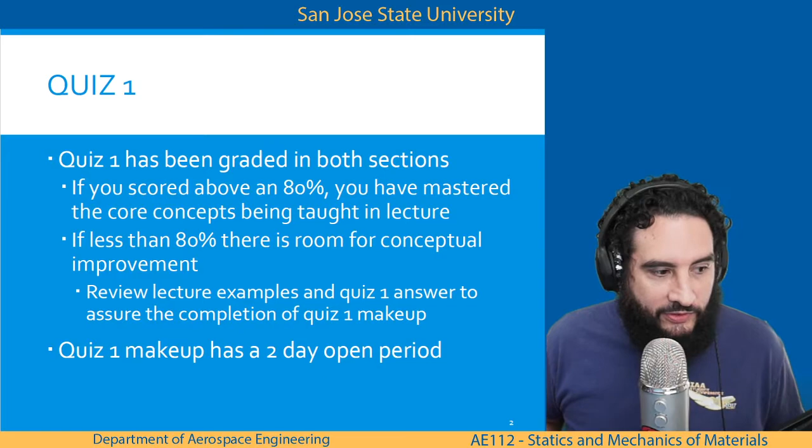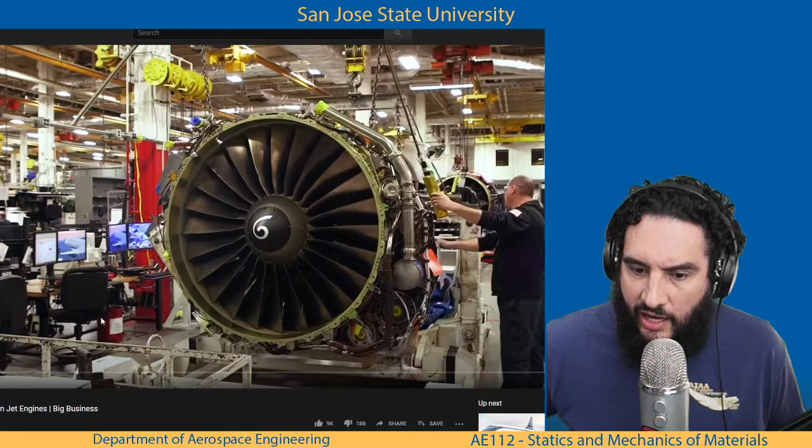Pause the music for a second. Valhalen, what part of the engine are you talking about? Because not one person designs everything.

Yeah, I thought that was pretty cool. So thank you so much, Adam.

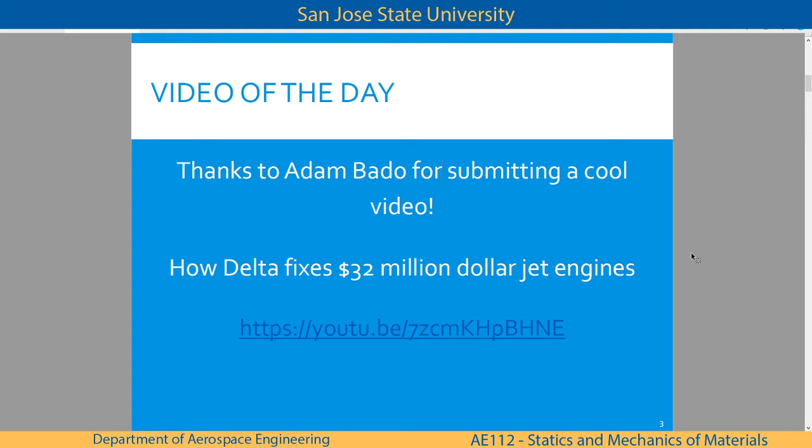Okay, let's get back into it. Propulsion. A lot of propulsion is done by chemists because at that efficiency, at that level, they want to make sure that every single particle of fuel is being mixed with the right amount of oxygen and being heated the right amount. And so that is a chemical reaction.

If you want to talk about turbines, aerodynamicists are going to deal with that. Aerodynamicists are going to do a lot of the things, but propulsion is one of those things where you're like, are you talking about how we're compressing air or how the mixture is happening? Stoichiometric - yeah, it has to be, well, supposed to be perfect.

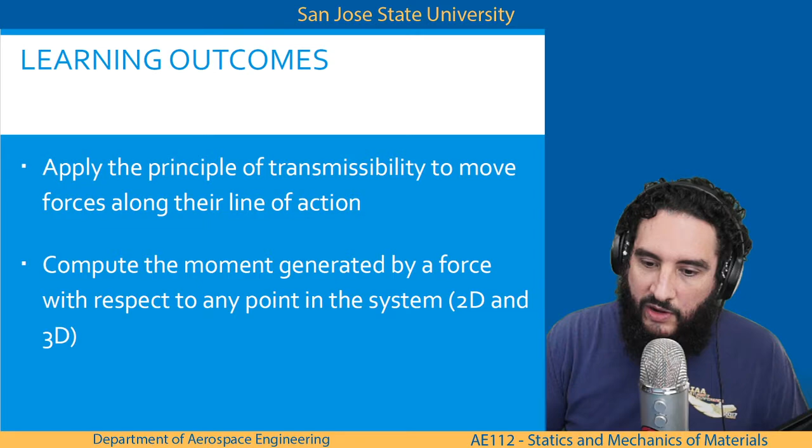Okay, so today's learning outcomes are going to be to apply the principle of transmissibility to move forces along their line of action, and to compute the moment generated by a force with respect to any point in the system, in 2D. I didn't get to 3D yesterday, but I'm going to try to stick around after this lecture and create a video, so that we have a moment generated by a force in 3D. We have that example.

Okay, so let's talk about equivalent forces. The first one we're going to use is something that makes it easy for us to make calculations later on, and it's called the principle of transmissibility. It states the conditions of equilibrium or motion of a rigid body will remain unchanged if a force F, acting at a given point on the rigid body, it is replaced by another force F prime of the same magnitude and direction but acting at a different point, provided that the two forces have the same line of action. I'll let you guys read this and absorb it, as this is something we're going to use and abuse to make our math easier.

So the truck here has a weight, 2 reactionary forces on the wheels, and it's got 4 people pulling on a rope in front of it, force F. If you take those 4 people, exchange the rope for just their hands and push on the back of the vehicle, it's the same thing, it's fine. Okay, moving on.

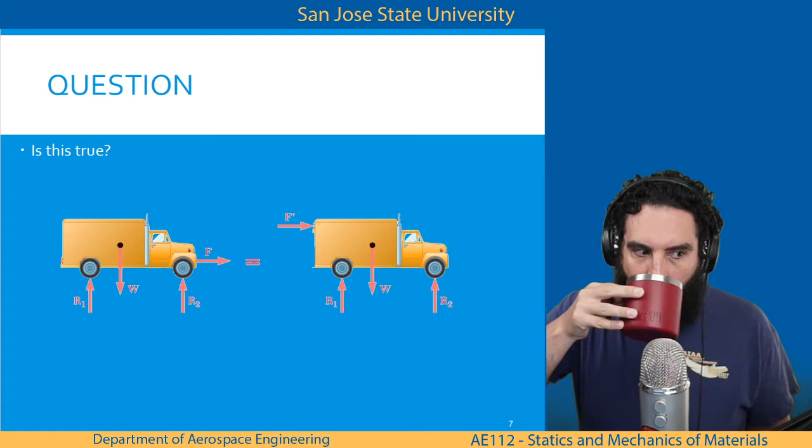Anybody for yes? I didn't get anybody with this today. This is like one of the very few times where I'll give you a gotcha question. Wilbur, I'll go yes - yeah, Wilbur, if you can unmute and describe why you think it's yes, we'll hear what kind of possible answers we can have.

Shit. Explain to us why it's no then, Wilbur. Sorry, no mic right now.

All right, Ryan Murphy - was that? Ryan, explain to us why it's no. Because in the first, on the left side of the equation, it's a pulling force, so it's just horizontal. But when you have that on the right side, it's at the top, the force is high up, so it's pushing it around the center of gravity of the truck, creating a rotational force instead of just a straight one. Well, it's both rotational forces, but they're in different directions, if that makes sense.

Yes - not quite what I was looking for, but yes, this is not true. Anybody else want to take a stab at this? Rashad?

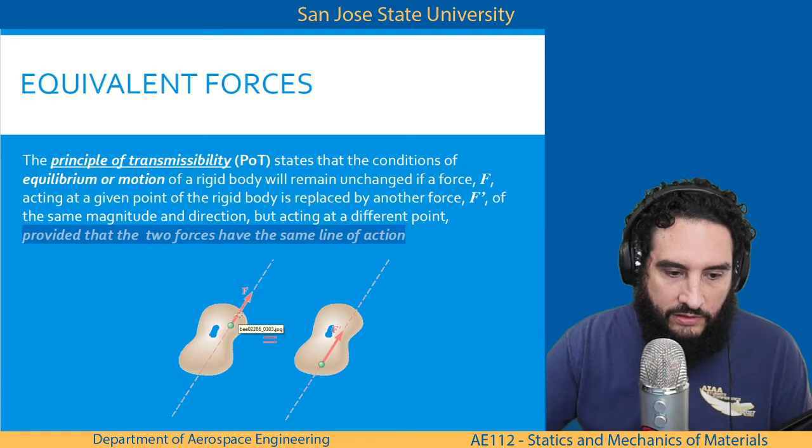I was just gonna say it's not on the same line of action. It's raised. Correct, and that's really the big deal that we're dealing with here. So if I go back a couple slides, this says same magnitude and direction, which is something that we satisfied with that. F and F prime looked the same magnitude and direction, but they are not acting on the same line of action. So it was Ryan that, what happened here?

So we talked about rotational, what the truck would actually feel, and he's spot on with that, because on the left hand side, if you put a pin at W and we're able to pull F, it would rotate counterclockwise. Is this counterclockwise to you guys? It's counterclockwise to me. It'll rotate counterclockwise. But if you put a pin at W on the picture on the right hand side and push with F, the truck would rotate clockwise.

Ryan, it's okay. As long as you're brave enough to speak up, I don't care. But we like to hear these dissenting arguments, because you're going to be in a boardroom one day and people are going to say, no, that's not right, and have some physics or math to back it up. And you just have to be able to keep your wits about you and say, no, we go back to first principles. These are why we cannot do that, or this is why we can do that. So we're all good here.

So correct answer was no. Even though it's acting in the same magnitude, same direction, it's not on the same line of action, and therefore this is not true. Cannot do this.

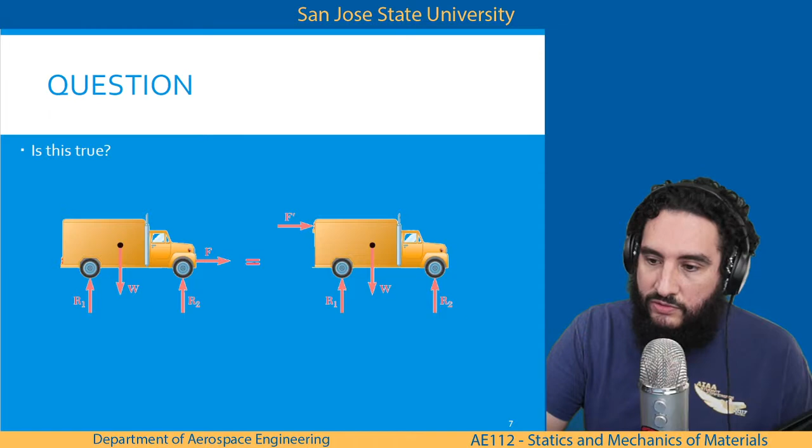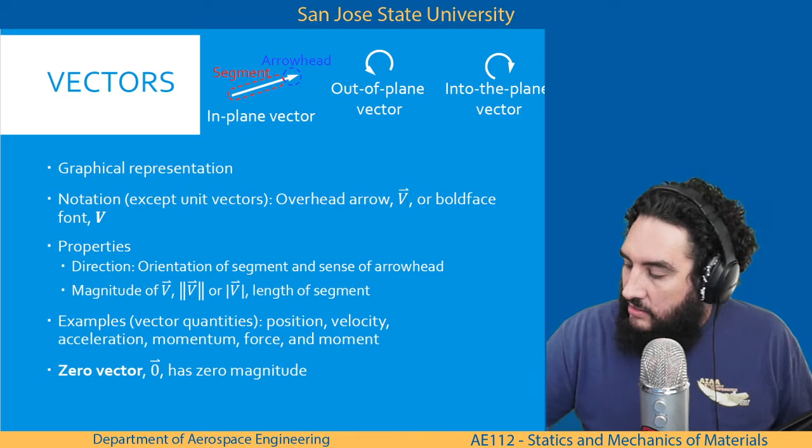Okay, the vector product direction is going to be perpendicular to the plane containing P and Q. So the plane here, P and Q, the resultant vector of this cross product is going to be out of that plane. It's going to be perpendicular to it. And its positive direction is based on the right-hand rule.

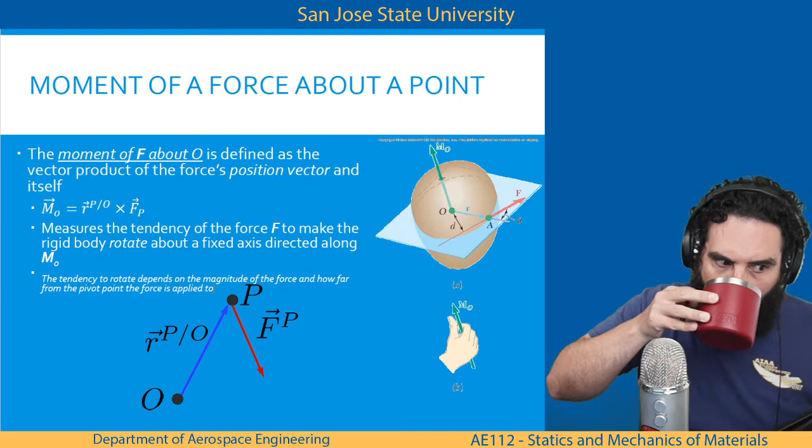Long enough stick and you can move the world? Technically, the world would move the stick and you just drift apart. All right, any questions? Moving on.

Let's do an example. A 20-pound force is applied to the control rod AB as shown. I'm going to be calling this member AB because this is actually a rigid body member. So when you see something that looks like AB, calling it a member is a little easier for someone else's mind to pick up and know exactly what you're talking about.

An Archimedes quote. Dope. Did not know that.

So, knowing that the length of the rod is 9 inches and that alpha is equal to 25, determine the moment of the force about point B. Do this two ways. We're going to resolve the force into horizontal and vertical components exactly as it sits, the typical y is up and x is out to the right. And then we're going to do it again by resolving the force into components along AB and in a direction perpendicular to AB. That's fancy for saying we're going to rotate the coordinate axis, and we're going to use the principle of transmissibility to simplify our math equations.

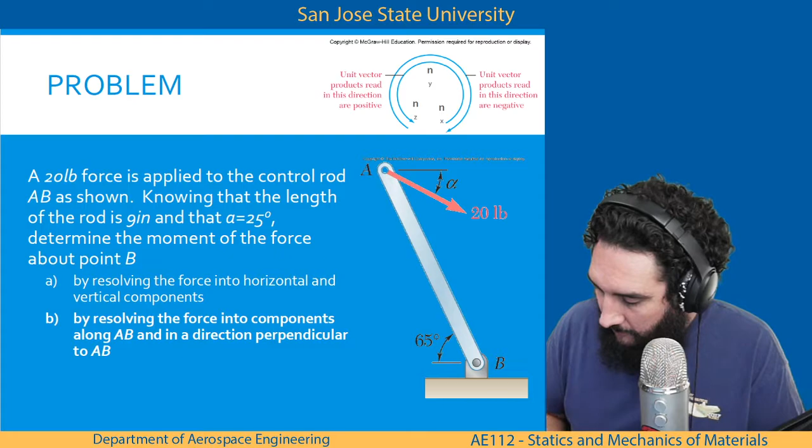I'm excited. I'm going to show you guys something new pretty soon. All right. New reveal. We got a different camera angle. Hopefully it's gonna be better. Fills up more of the screen, but the only challenge I have with this is whenever I move anything on the desk, the camera shakes. But I'm trying.

Okay. Does your free body diagram look like mine? Okay. So I have my drawing redrawn here. People always ask me, why do you redraw these? And yeah, it's for you. Even when I was going through school and taking this class, I would redraw the picture simply because if you're staring at a blank piece of paper and you don't know where to start, redrawing the picture allows you time to do something else with your eyes and your hand because you're just copying, right? You're not really thinking about what you're doing. And it allows your brain to process what's actually going on here.

Where's this angle measured from? Where's this force being applied? What are these vectors asking for? You have time to think about it and process. Like when someone asks you an interview question, like, well, tell me about yourself. And you're like, that's a really good question. That's one of those stalling tactics your brain can use so that you can load into RAM your thoughts, and it comes out nice and smooth. No stutter.

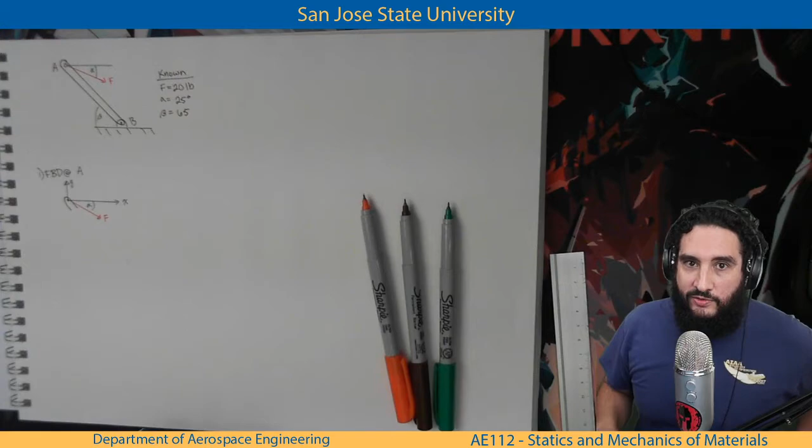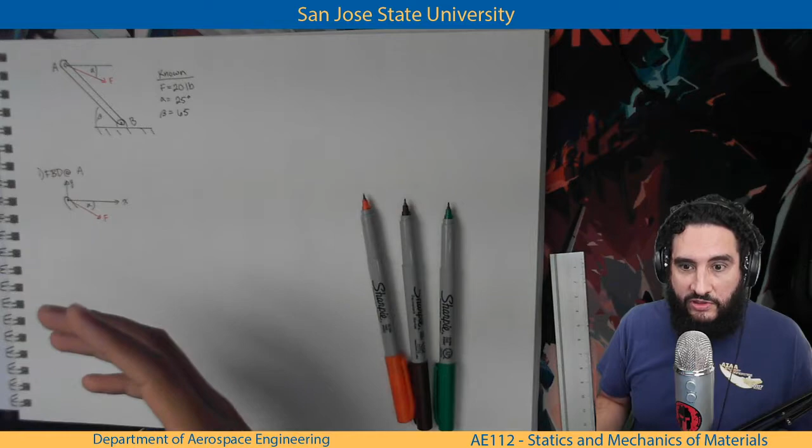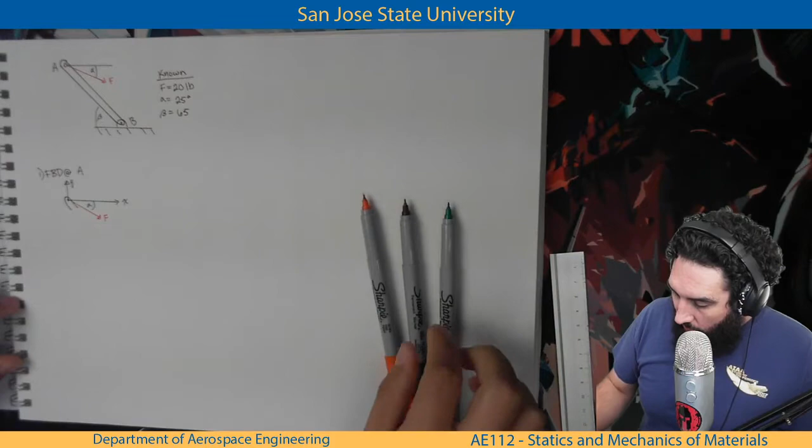Facts. Okay. So that's a reason why I like to go through these. Kind of gets me primed up, familiar with the problem. And then I don't need to keep looking back at my reference source. I can look at my drawing. Okay, so I have my free body diagram at A. And let's turn this on. Oh, I made this bigger too. Although my head blocks a little bit of it, you still see most of it.

Okay, so I have my free body diagram, and I want to resolve the force into horizontal and vertical components. So I have a standard Cartesian coordinate system, with X off to the right, and Y going vertical as I see it.

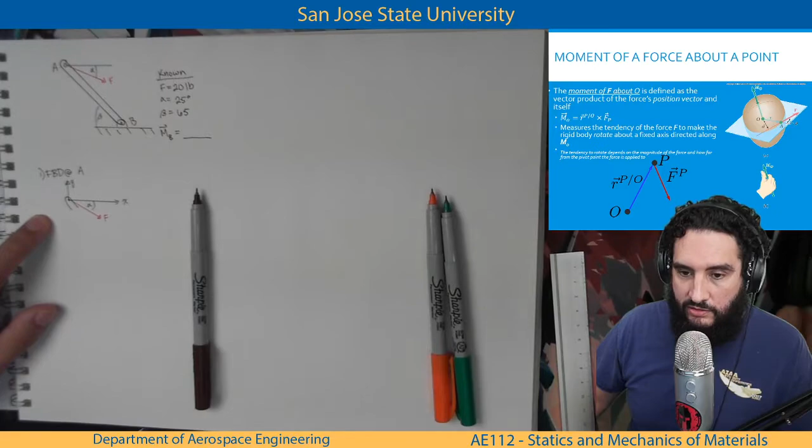So we want to answer the question: determine the moment of the force about point B. So I'm looking for vector M about point B, equal to... if we go back to what M is equal to, it's R cross F. So let's find the R vector, then let's resolve the F vector, and compute our moment.

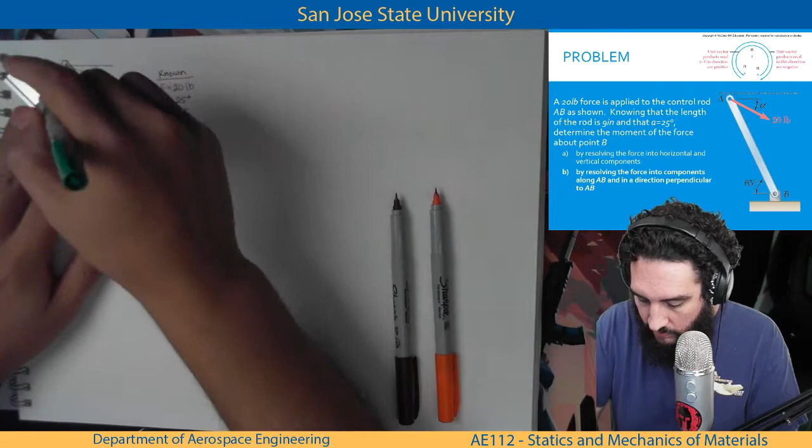Oh Dalton, you're absolutely right, my drawing is missing the length. Keyboard's in the way now. Good catch, Dalton. And we are at 9 inches. Okay, good, now I think we are set up and ready to go.

The R vector. So, step 2: define R, A to B, and force in x, y hat.

Okay, so let's start with our position vector, B relative to A. And this is also going to equal vector BA.

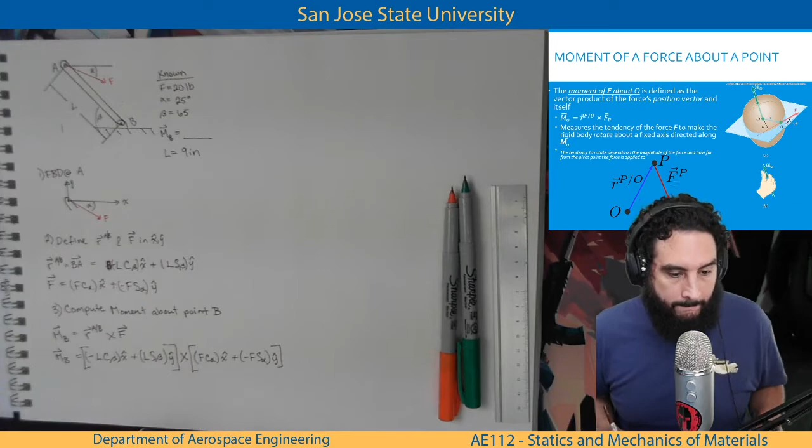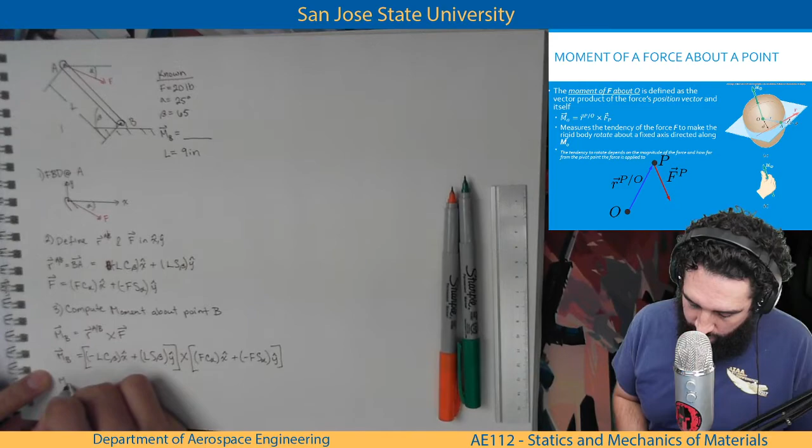We happy? We tracking? Okay, so now...

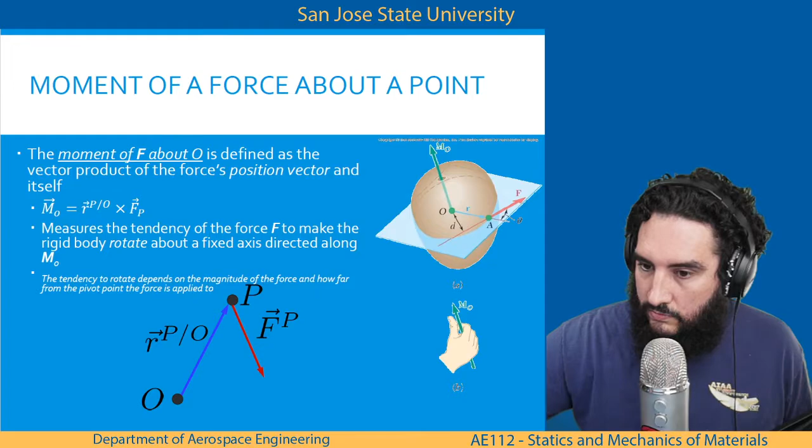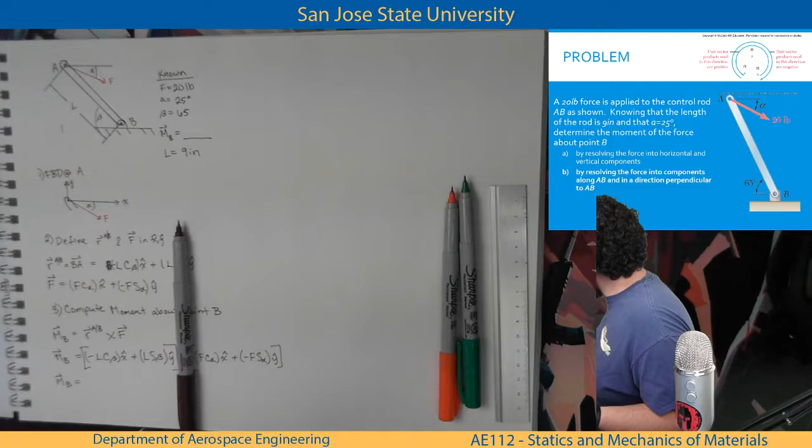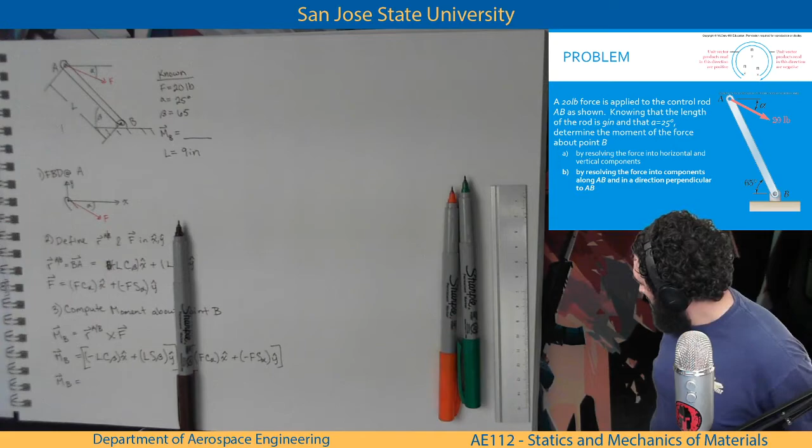He literally tucked himself into the bed and he's barking from underneath the bed right now. Navas? Nope, wasn't the dog. It was grandma telling me she's leaving. He's in the bed right now, tucked himself in, unmade my bed.

Where were we? So we're about to FOIL this R cross F. X cross X is going to be equal to 0. Y cross Y is going to be equal to 0. So let's FOIL this out.

Negative L cosine of beta times F cosine of alpha in the x hat direction is going to equal 0. We'll move on to, let's write that out: negative L cosine of beta times F cosine of alpha. And I'm going to cross this out and call it 0, because x cross x is equal to 0.

Move on to L sine of beta times F cosine of alpha. Okay, so now I have a y cross x. The resultant vector is probably going to be z because I don't have a z, but what direction?

So this is when I write out x, y, and z. Okay, I don't care what direction you put these or where you put them, x's on the top, y's on the bottom. That doesn't matter. What you need to think about in your head is that with the right hand rule, x cross y equals z. That's the right hand rule.

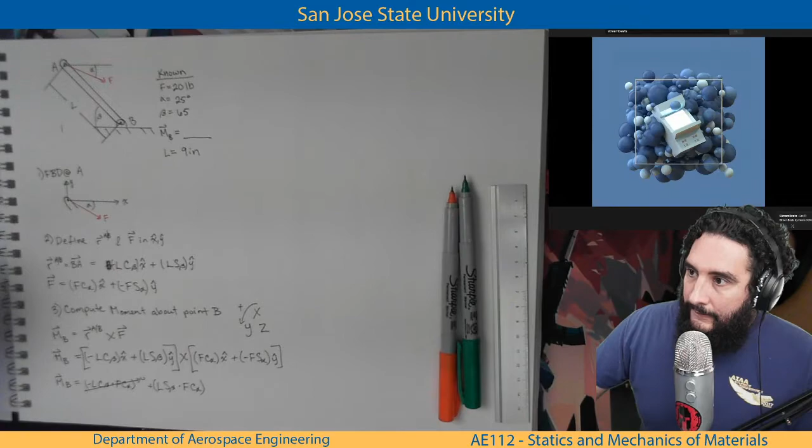Something happened to music. F's or pogs in the chat. I need something here.

Thanks, Jose, F on the drawing. We'll do it many times. But X, Y, and Z, from X to Y, arrow, make that positive. Alpha? I don't know what that means.

I'll go through this because I'm getting a lot of F's, it's okay. So Y cross X is going against the positive direction, so I'm going to add a negative in here. And I didn't leave enough space, so there's an extra negative hanging out in the middle of space, and that is going to be in the Z hat direction. So I did X cross X and Y cross X. Then I'm going to do X cross Y.

Negative L cosine of beta multiplied by negative F sine of alpha, and it's X cross Y. X cross Y is going in the positive direction, so that will remain positive. And the last one is L sine beta Y hat times negative F sine alpha Y hat. These are also going to equal 0, because Y cross Y is equal to 0.

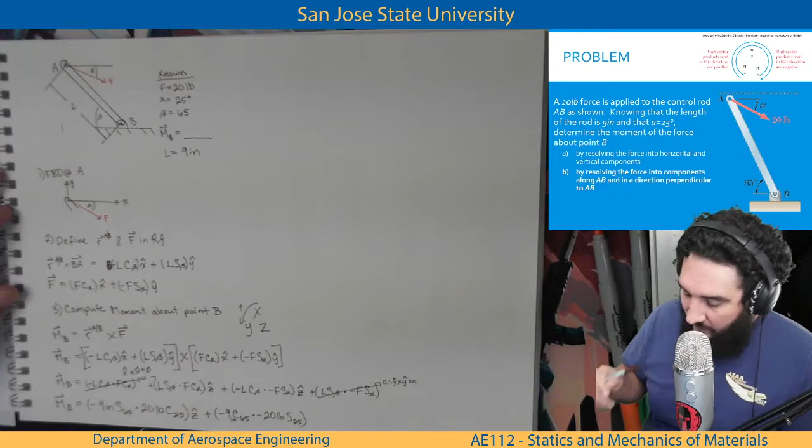Oop, that's not a 4. Moment B. I don't know where I put my calculator. Found it.

Can we see this? That's pretty good. Okay, negative, parentheses, negative 9, sine 65, close parentheses, times 20 cosine 25, close parentheses, enter.

Negative 147. Check the notes. We good. And the units on this are going to be inch pounds.

Open parentheses, negative 9 cosine 65, close parentheses, times negative 20 sine 65, close parentheses, enter.

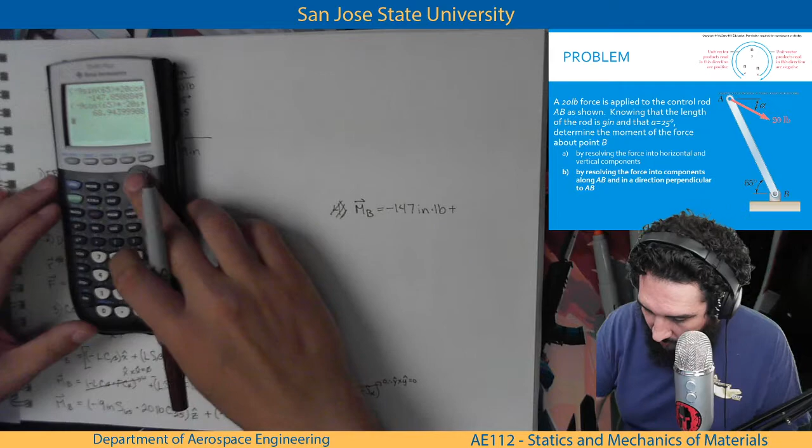68, did we get that right? We did not do that right. What happened here? 25.

So I made a calculation mistake here, where on my paper I wrote sine of 25, and in my calculation I wrote out sine of 65. These errors are super minimal, and as long as you show your work and what goes into it, if I would have put the 68 here, I'd have gotten most of the points. Maybe 2 or 5 points off, depending on the value of it, but it's going to be super minuscule. Don't worry about calculating things incorrectly.

My favorite part about vectors is little hats. Hey, I like those. Okay, so those added together will be MB equal to negative 115 inch pounds.

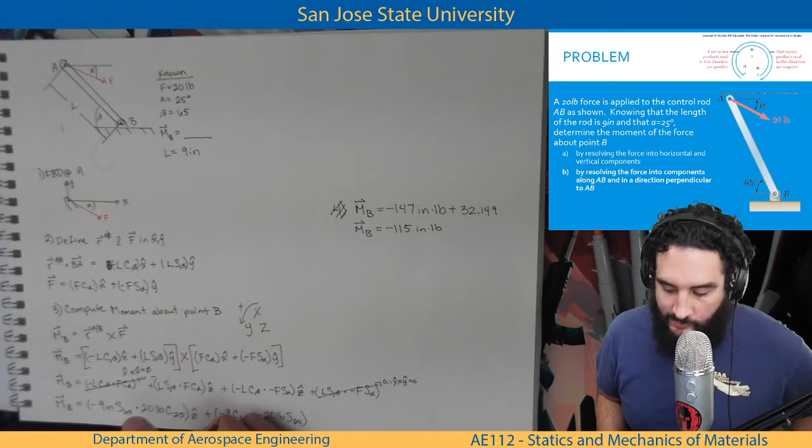The negative is important for us right now. Anybody want to be brave enough to talk about what the negative actually means in this example? Oh, somebody was unmuted. They're like, I want to be brave enough. Is it that it's going into the page? Yes, going into the page.

So let's unpack this a little bit. The negative 115 means that based on our coordinate system, if x is this direction, y is this direction, the positive moment will be notated like this little picture that I drew before. Positive, positive, and that's my moment, positive direction.

That's the right-hand rule. Because it's negative, it is not acting in this direction, so I can report my answer as 115 inch pounds, and I can draw the vector the correct direction. Or I can put clockwise, CW. So this would be generally the most accepted answer. Negative 115 would be fine too. You could circle that, not a big deal.

But in your head, you should say, okay, if it's acting counterclockwise or clockwise, does my picture agree with that? And so if I'm looking at point B and I have a force vector that's pushing this direction, pulling this direction, the tendency for it to rotate is around B in the clockwise direction.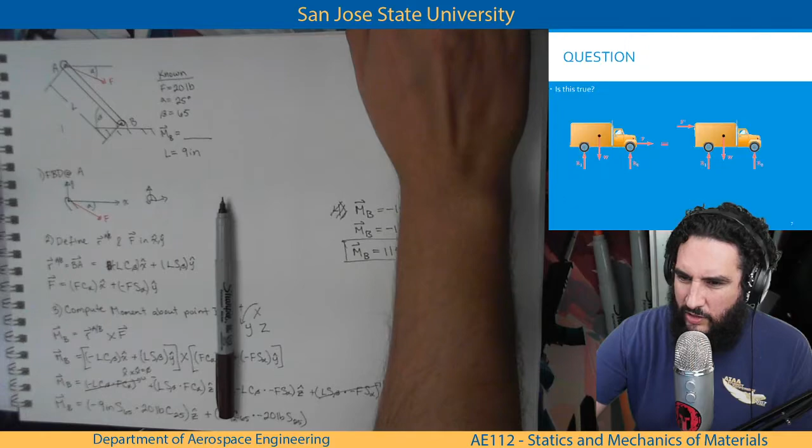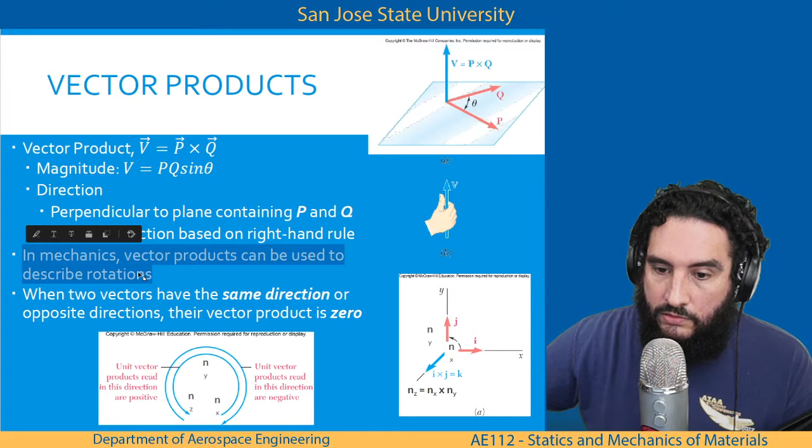So this is what we are using this for. In mechanics, vector products can be used to describe rotations. We are describing rotations with these moments. So when we want to describe the rotation, simply putting clockwise or negative 115 inch pounds. I guess the negative 115 inch pounds, you could put z-hat here, showing that we rotate about this point.

But that's still, no, that's not true. You can't do that, because a moment is not in that axis.

Okay, we would expect that since the force would make the arm rotate clockwise, right? Yeah, we would expect that. By visual inspection, if you set this up and you pull the string, it would rotate clockwise about point B. Okay, we happy with this?

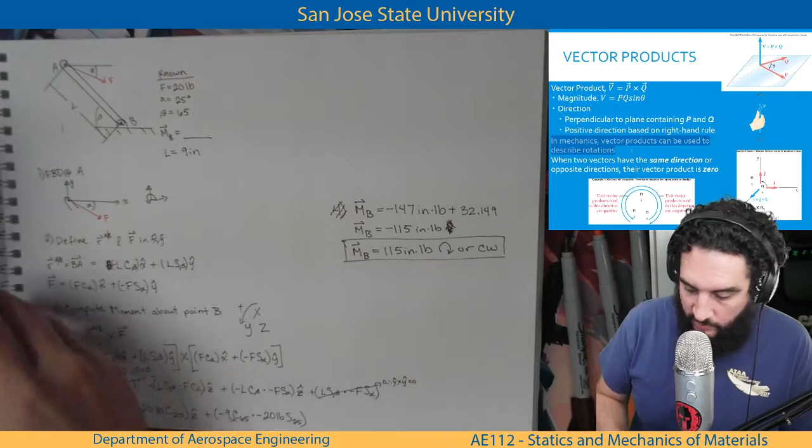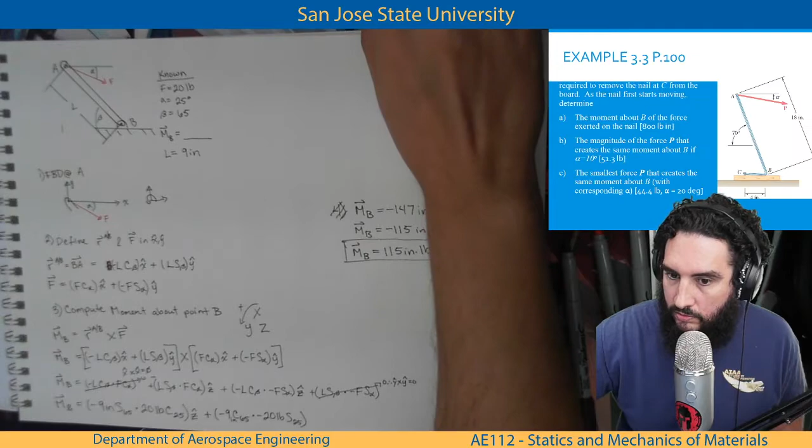Let's move on to part B. And remember, point B, part B, is going to be resolve the force into components that are along AB and in a direction perpendicular to AB.

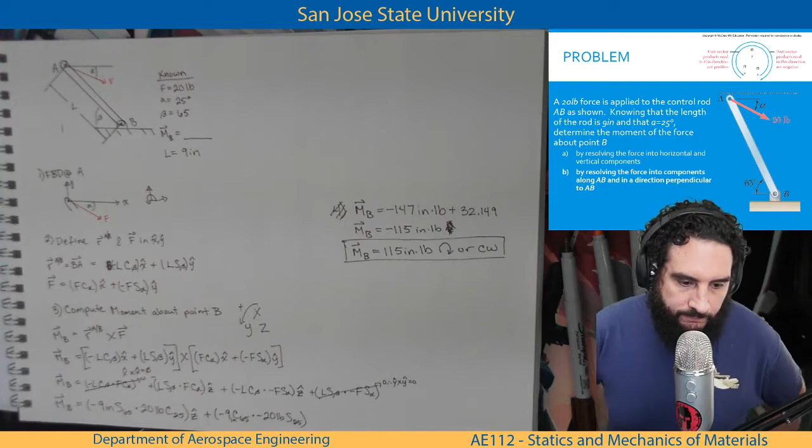No, Ryan, it cannot. Because once we do the X and Y calculations, actually, that's a more complicated question, and I don't know what you're looking for, but we'll talk about the different ways it can be reported. Because if we're in 3D, we can have a rotation about axis Z, we can have a rotation about axis X, and we can have a rotation about axis Y.

It can't because it's a cross product, but if you have multiple things working on a particular body, you can have rotations about all three axes. So we can report a force in the X, a force in the Y, a force in the Z, and we can report moments about X, moments about Y, and moments about axis Z. Force about points, moments about axes, because they're rotations. Okay.

Let's move on. And we're in lecture 4. Example 1. Part B.

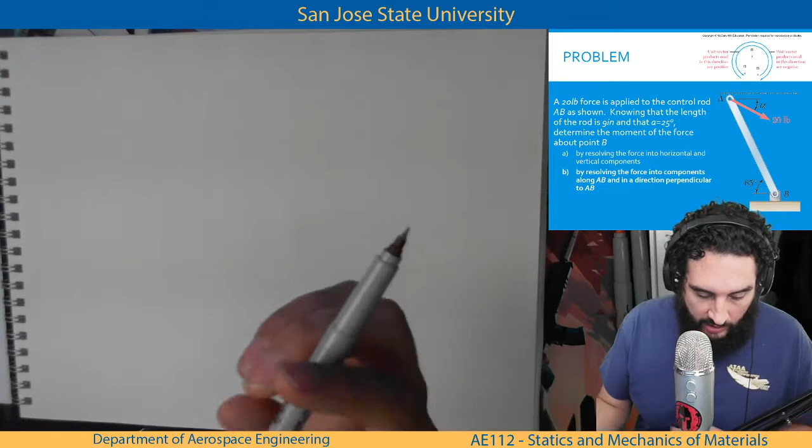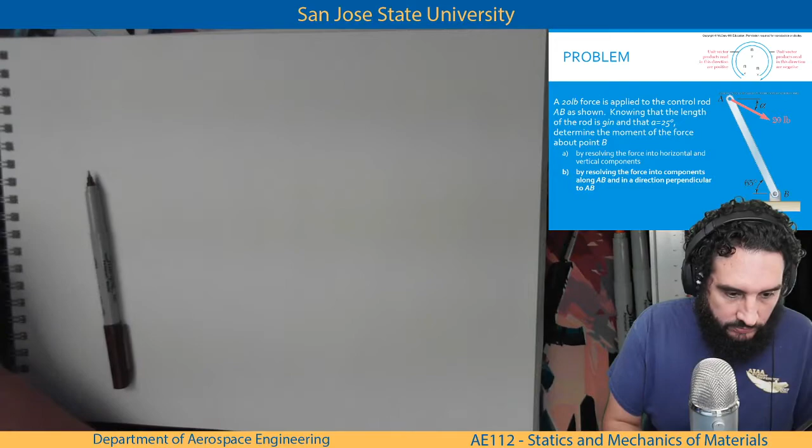Okay, I'm going to draw the same thing a little less neat this time, and we're going to see what it's like if we have a rotated coordinate system, what it does to our calculations.

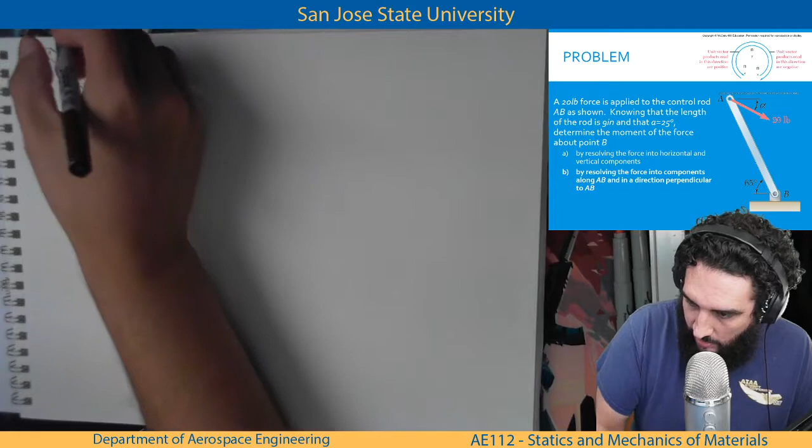Member AB, B, A. Okay, again our knowns: length is equal to 9 inches still, F is still equal to 20 pounds, alpha is still equal to 25 degrees, beta is still equal to 65 degrees. I think that's all I need.

Okay, again, so we start with our free body diagram at A. Now in the free body diagram, we would like to resolve the force into components along AB and in a direction perpendicular to AB. I'm going to show a rotated coordinate system axis, which this will now be Y, and this will now be X. We tracking with this?

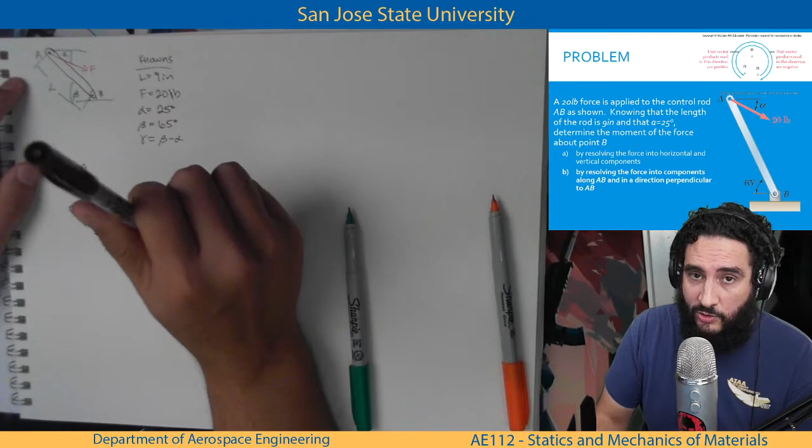Is this the way it was done in the example in the book? I'm not sure, Rashad. I'm not sure. It probably is. I know there's a question on the homework very similar to this, so pro tip, if you're doing the homework, this is on there.

Are we happy with gamma equals beta minus alpha, using alternating interior angles and beta? And that's going to equal 40 degrees. Perfect, that's why I asked.

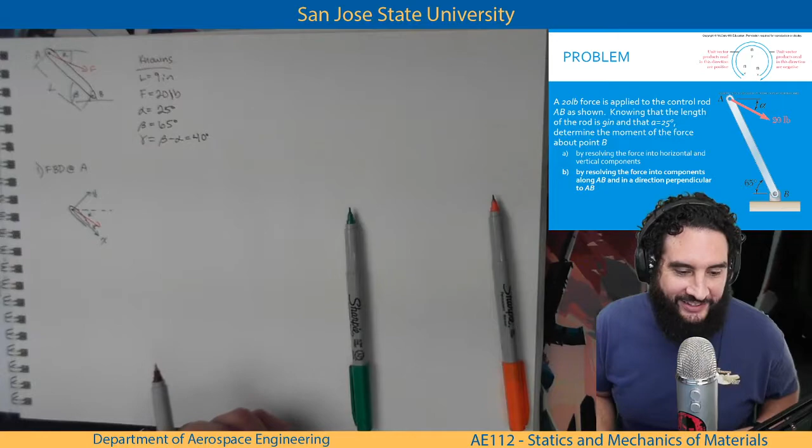Okay, so we're all set up now. We have alpha defined, we have gamma defined. Let's move on to resolving. I can't move the paper. Ooh, I want to draw over here. So moment is equal to r cross F. Let's draw r first.

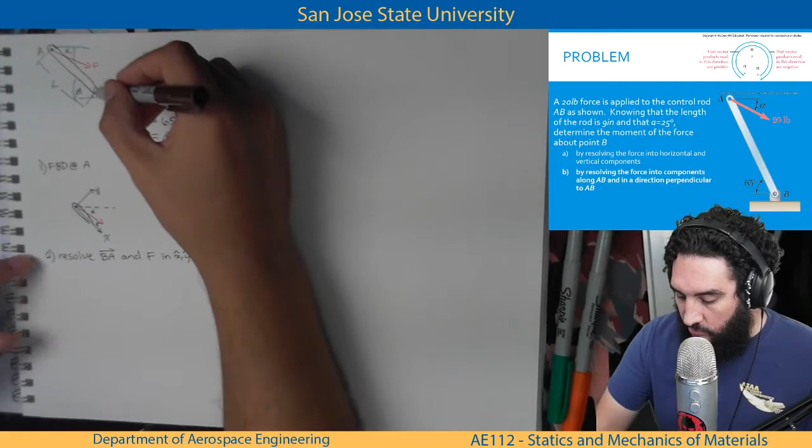Resolve BA and F in X and Y. Member BA in the rotated coordinate system axis, distance from B to A is still 9 inches, and it's going to be in the X direction, so BA is equal to 9 inches, L, X hat. Since it's going from B to A, and I have X set up going downward and to the right towards B, this is going to be a negative length.

Gamma is smashed in between this little spot here. What happens when I don't use a ruler and stuff. So gamma is the distance between - gamma's right here. I put gamma here, but it's a pretty bad drawing. Okay, we all happy with how we have negative the length in the X direction based on our rotating coordinate system?

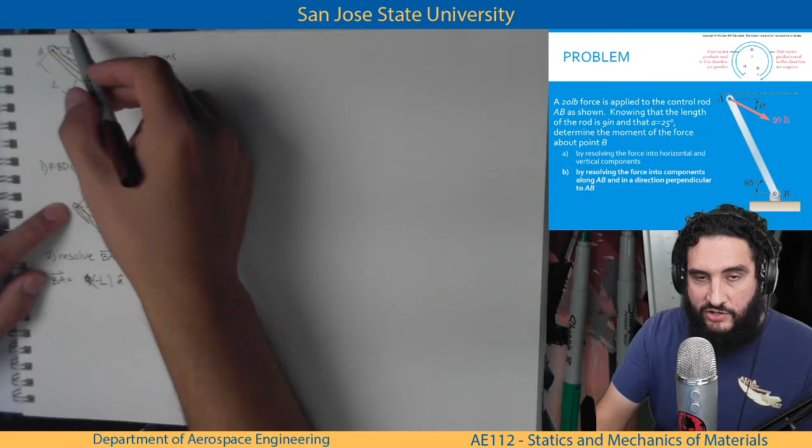Okay, why is X negative, and why do we have Y? So I have now taken my coordinate system from the standard X and Y, and I have rotated it to be along the member AB. So if this is member AB, this green pen is member AB, this is Y and this is X. From B to A, from point B to point A, that distance is 9 inches. It's L.

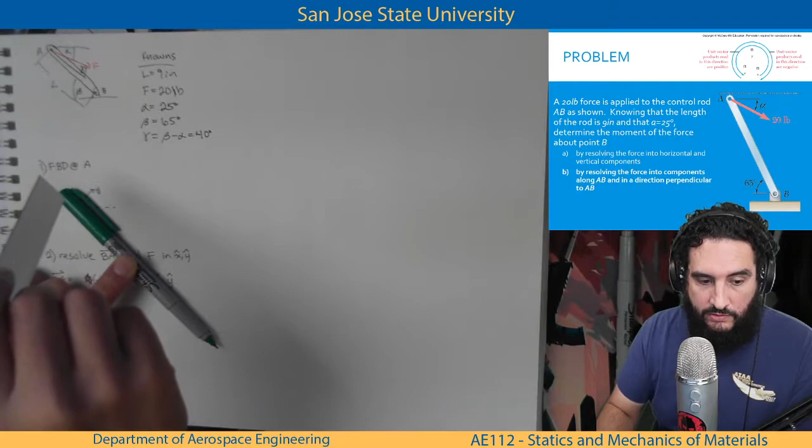We have defined from the cap to the tip to be positive, that direction, downward and to the right. From B to A, that is going the opposite direction, so from B to A, it looks like it's going negative L inches. Tracking, Wilbur? So that's why it is negative L in the x-hat direction.

This is another thing that tripped people up on the quiz - relative to one point relative to another point, and what makes things negative. So I'm okay with answering these questions. And then 0 y hat, because we have nothing in the y. It is essentially on the x-axis, so we don't have a y component. So if we rotate our coordinate system, we only have one component taking part in this moment calculation.

Okay, so let's go on to F. F in the x direction is going to be equal to F cosine of gamma, x hat direction. We've defined it down to the right, F is going down to the right, so it's going to remain positive. Y hat direction is going to be magnitude F times the sine of gamma, and y is up, F is also going up, so that value will also remain positive. Are we happy with how we got here?

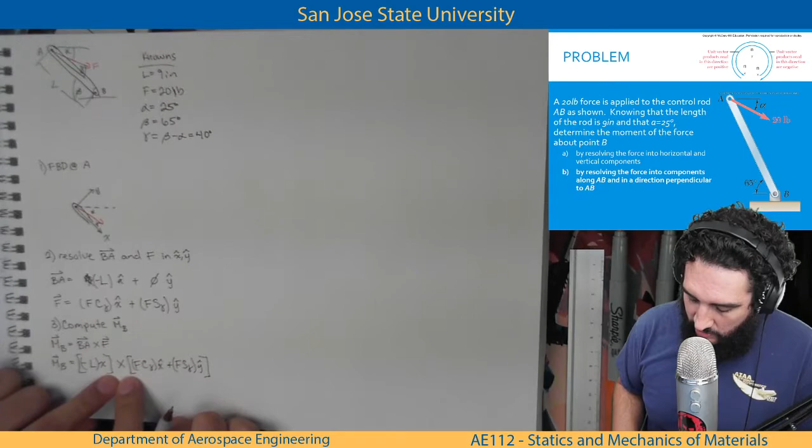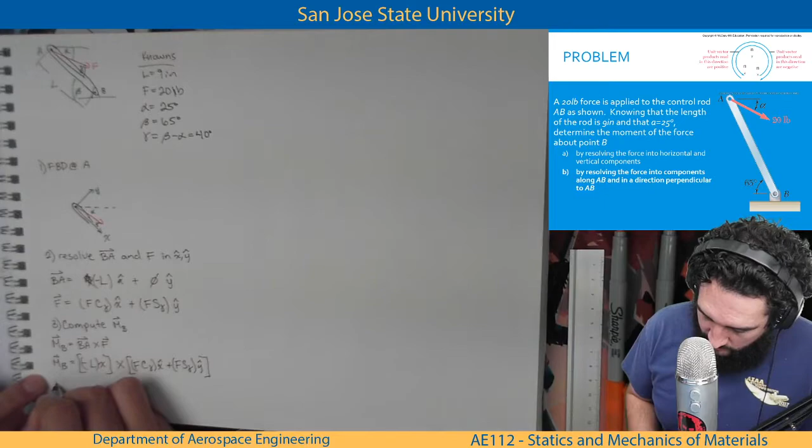For the moment calculations, I really enjoy using brackets to separate the two values so I know when I'm adding and when I'm multiplying. Let's plug in the values. Actually, let's do the calculation first and then I'll plug in the value.

So negative L x hat times x hat. We don't need to do that calculation, we know it's going to be 0. I'm not going to copy it down again. Fine.

So I'm going to do x cross y. So negative L times F sine of gamma, and I'm doing x cross y.

I know that via the right-hand rule and this motion I do in class all the time, x cross y is going to be positive. I know that x cross y is positive. I know that. And x cross y is positive.

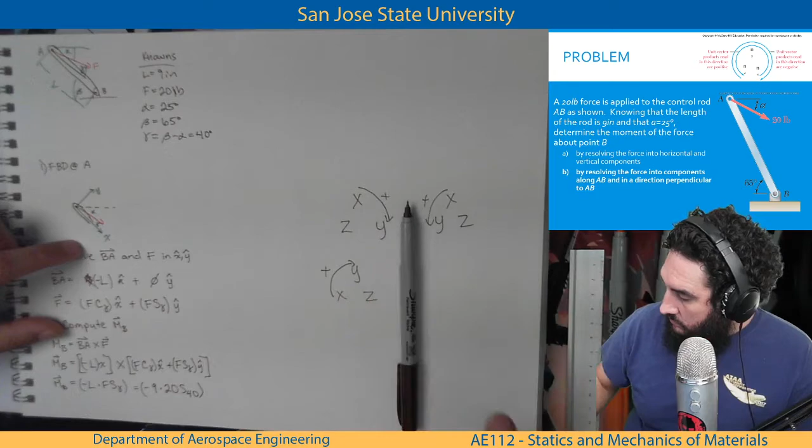So this will equal negative 9 times 20 sine of 40. Negative 9 times 20 sine of 40. Negative 115.7 — what do you know. I might round this up to negative 116.

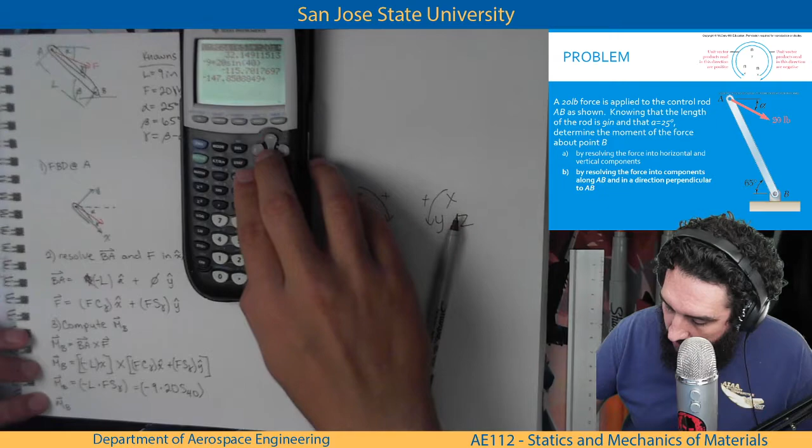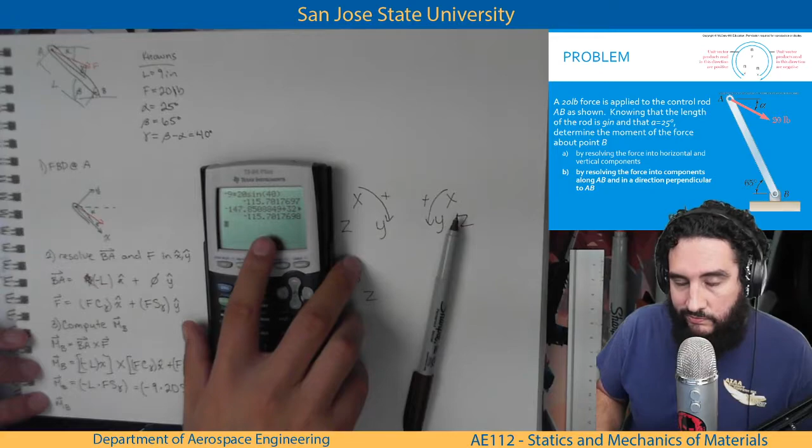So MB — actually, what did my last one come out to be? Oh, I didn't do it. Okay, so they literally came out to the exact same thing, 115.7. I probably should have rounded that up to negative 116. It's still within the margin of error, it's fine.

Somebody want to enter? Oh, I totally did. Totally did. Somebody want to answer Deshant in the chat, in the Zoom chat?

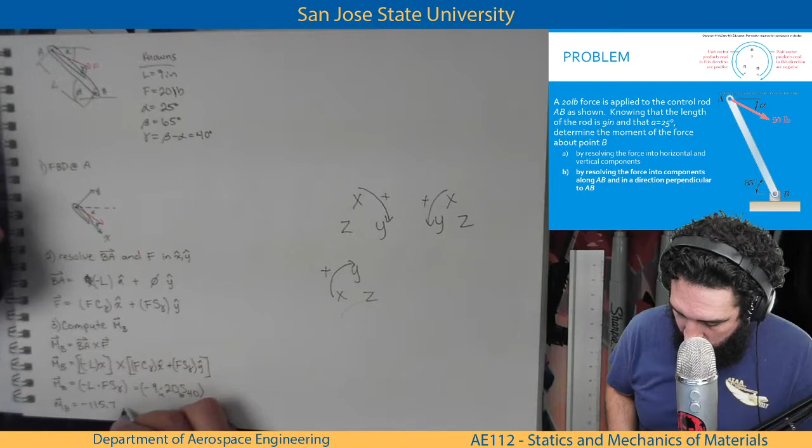So negative 9 times 20 pounds sine of 40, negative 115.7. Again, this answer is negative because it is not going the direction that we set forth here — it is going in the clockwise direction. 115.7 inch-pounds in this direction, or clockwise.

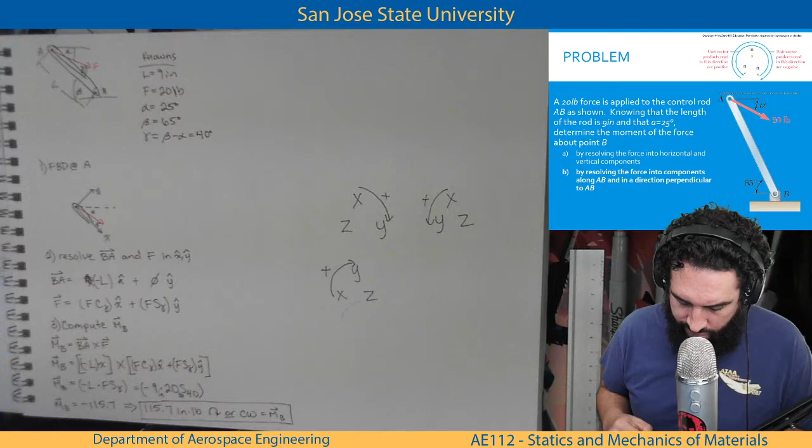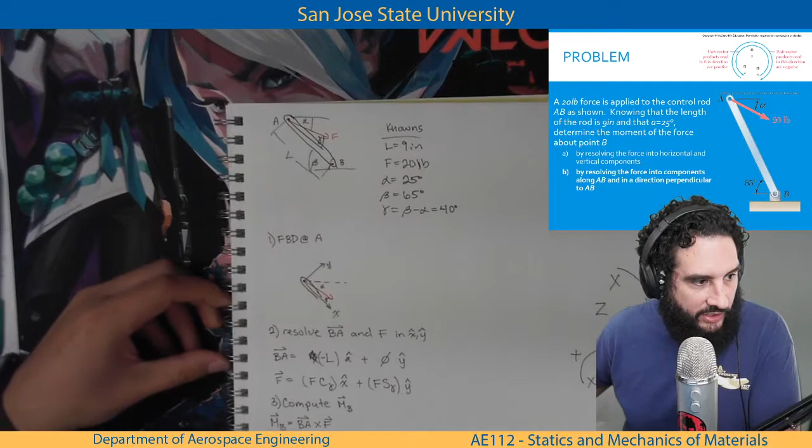Is it blurry on Twitch too? Thought I fixed this camera today. I'm doing the best I got, man, doing the best I can. Yeah, it looks a little fuzzy up here, and it looks really clear right here, so that's probably a function of where I have the focus set. Yeah, look how clear that is there. Woo!

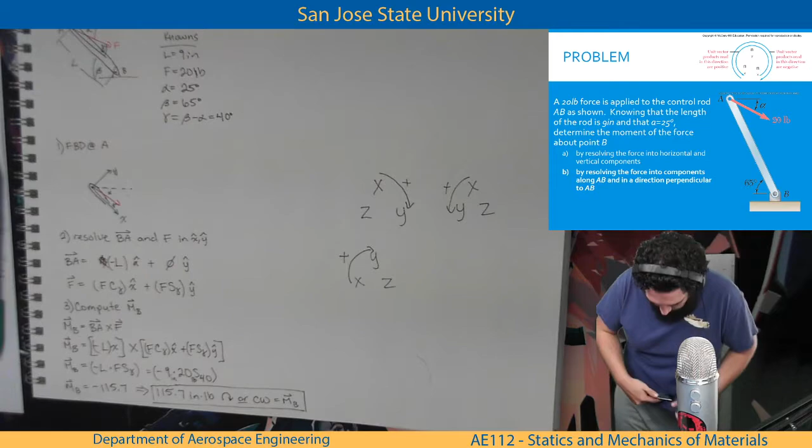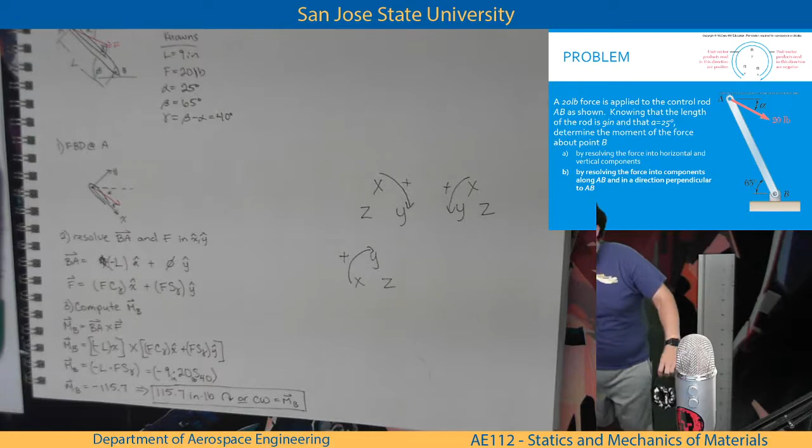Okay, we'll talk about this one day, because this camera is a DSLR on a tripod. This thing is super precariously placed, and I actually have a backpack holding it down on the other side. So, what it do? Yeah, I wish I could show you guys. Actually, I will do that — I'm gonna take a picture of this because it's ridiculous. I'll post those in the Discord. Yeah, this is ridiculous. Can I do this? Is this a thing? No. Anyways, I'll post them to the Discord, you guys check it out. But, are we happy with this?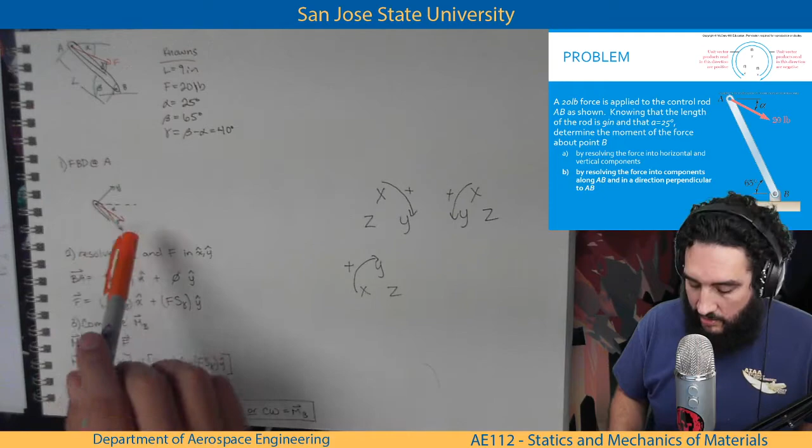Did you see how I used the principle of transmissibility to kind of backwards simplify my equations by getting rid of one component in the y direction and rotating the coordinate system? And I don't have a cosine and sine here, I only have a number. So that makes my calculation -9 times 20 cosine of sine of 40 — super simple calculation.